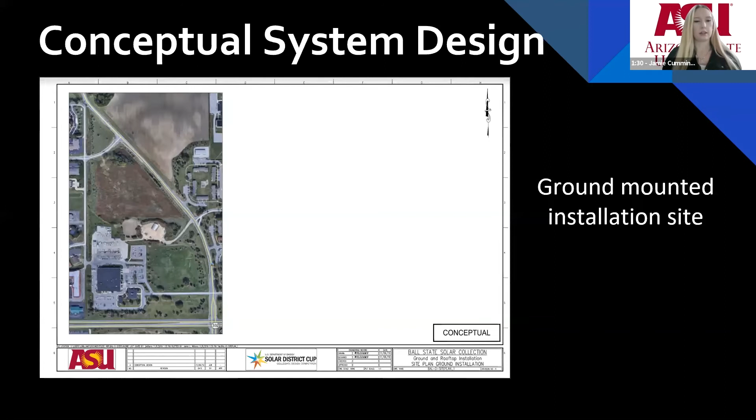Here's the deliverable package. You'll see this is the site for the ground-mounted installation. This is actually not the updated drawing. In the updated drawing, you'd be able to see exactly where everything is placed. And that will be the same case for the building mounts. But here we have a screenshot from Aurora. What we did to simulate the usage was take every use case that we had for Ball State, combine them, and use that as our usage for this particular area. And we arrived at about 5 gigawatt hours for the ground mount.

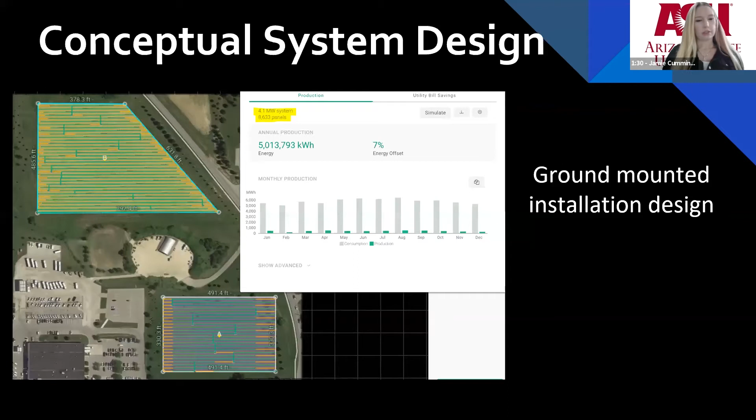Again, like I said, this is the building site. And this particular one is Robert Bell building. And you can see here all of the arrays. Now generally the spacing between them is about, let me double check. I believe we kept about 72 inches between the rows to prevent any shading, but minimal spacing in between, about 12 to 24 inches. And the panels are tilted at 55 degrees almost everywhere, facing due south.

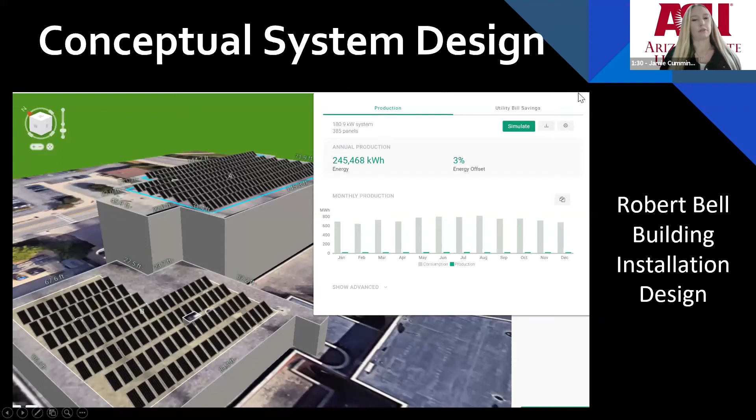So when it came to using OpenDSS, we relied heavily on Trent and his earned expertise through this competition. This here is the initial model. It shows the Ball State University's system without the addition of any solar PV. And then once we were able to get our solar PV, we were able to model it and show that we weren't reaching any peaks.

I think we're fighting over control of the slides. So we were able to, oh no, my slides are running away with me. Sorry, Anastasia, please reset and I'll leave the clicker alone on my side. Okay.

Okay, there we are. So we were able to show that we were not exceeding any max or min settings with the distribution system.

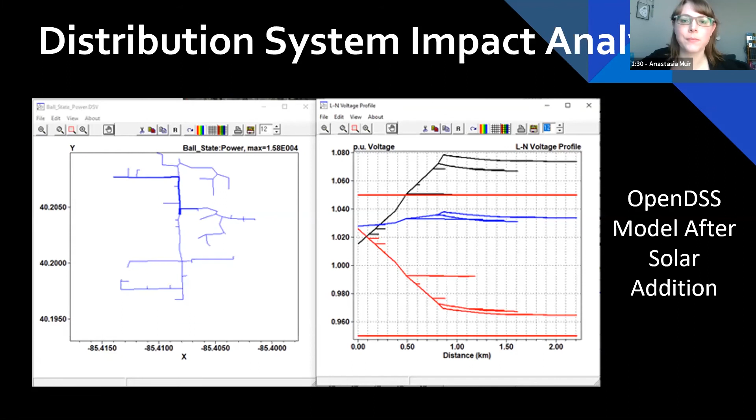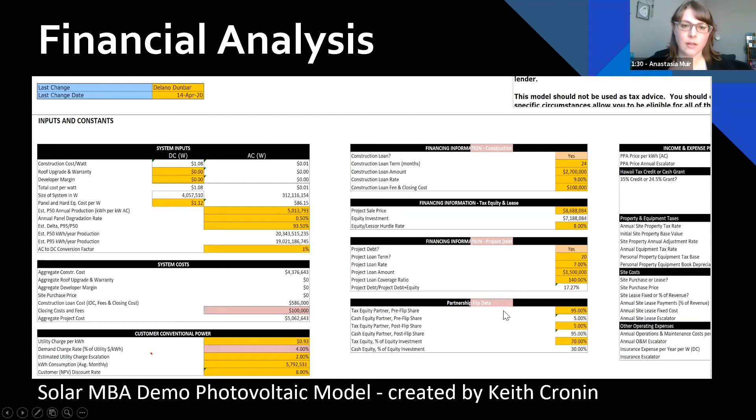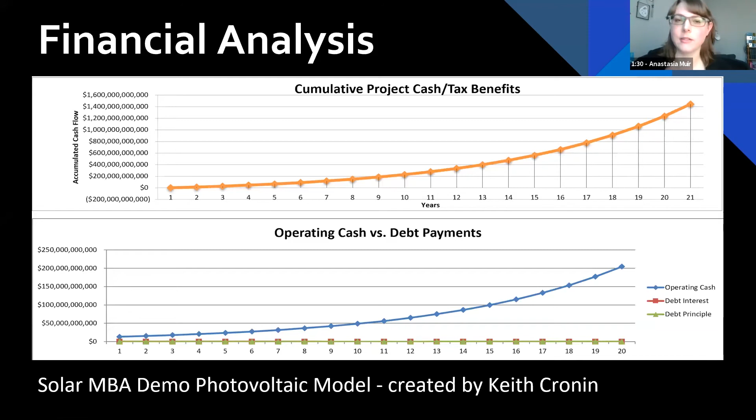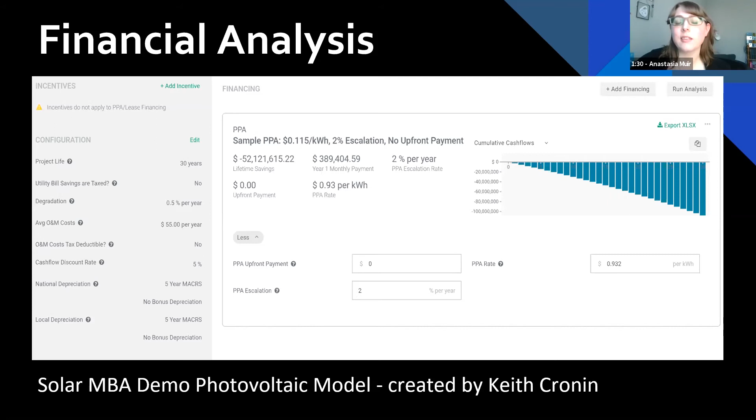When it came down to the financial, using the Solar MBA demo that was provided by the HeatSpring training was absolutely phenomenal for coming up with a financial model. Using the model, we were able to come up with these tax benefits and the debt versus the operating cash and show that we weren't getting quite the benefit that we were hoping for from the solar panels. It was going to slowly grow, but we were only getting about a 2% efficiency from the panels. So we only had a 2% per year growth on the PPA, which over 20 years is still significant, but we were hoping for a bit more.

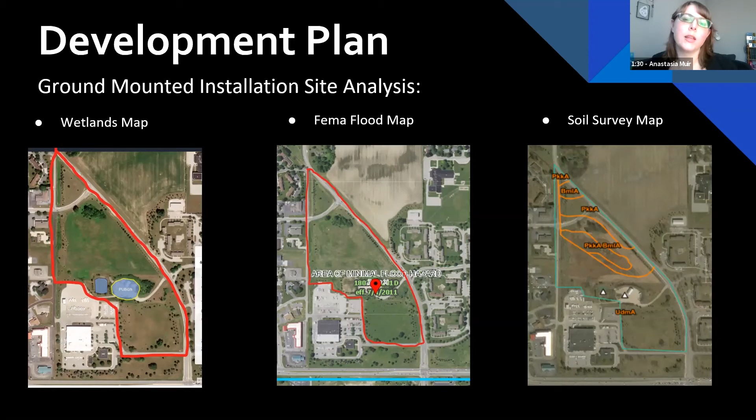A big part of my contribution to the overall project was the development plan and searching through all of the different maps to make sure that where we were planning to build the ground-mounted arrays would be ideal and that we wouldn't have too many financial problems having to grade or having to shore up if there was sandy soil. And we wanted to make sure that we weren't going to have any problems with tree shading. So we came up with an initiative to plant a tree for every tree that was cut down.

And we also found that across from the Ball State University buildings on campus, there is a Westwood Historic District, and we wanted to ensure that the buildings we were placing these solar panels on were not going to affect the aesthetic of that historic district, because then we would upset the residents, and we didn't want to have any sort of pushback or negative influence, because then we wouldn't have the support of the community that we were hoping for that would help us to build these panels on time.

And our construction schedule, with building the panels and installing everything at the ground mount and the buildings, we were looking at 32 weeks to complete construction, which is a bit of a stretch, but we didn't want to build everything at the exact same time, so we sort of staggered it so that we would impact campus life less.

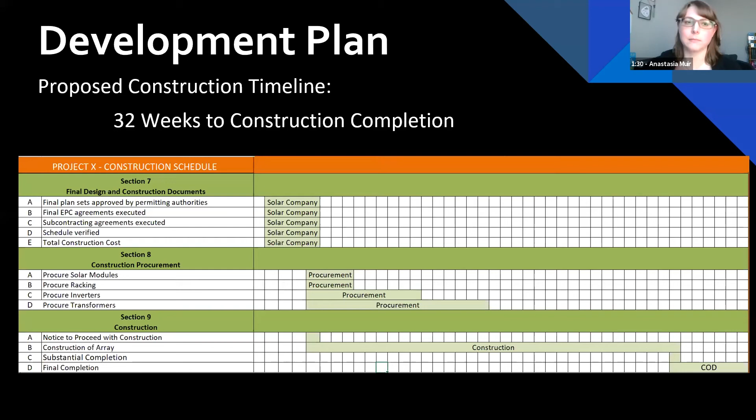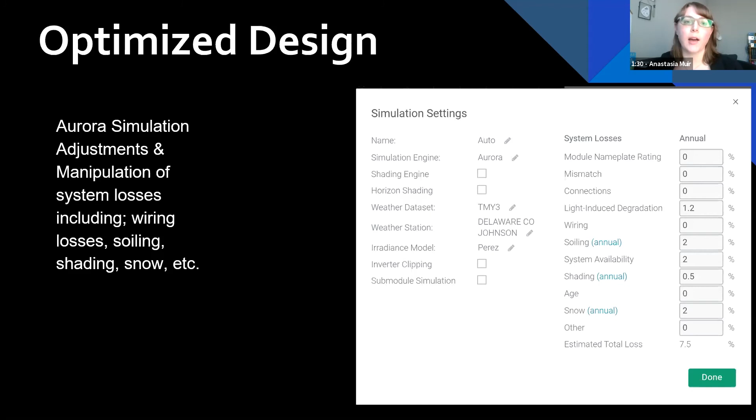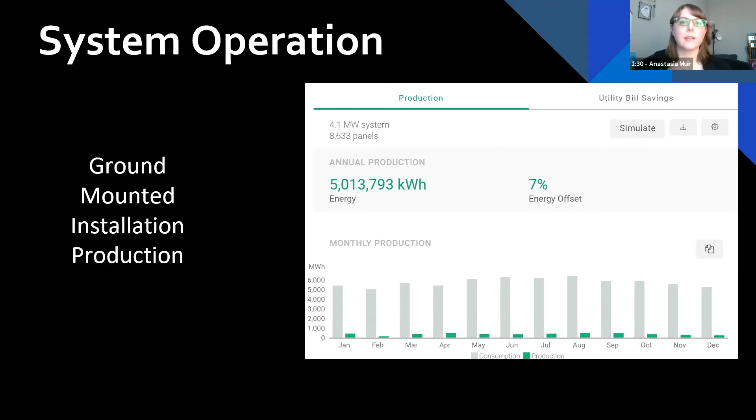Now, using the Aurora simulation, we were able to adjust the system losses and wiring so that we could optimize our design and get the most out of it. And even with that, we wanted to maintain realistic values. We didn't want to be living in some beautiful ideal wonderland. We wanted these numbers to be real. And when we came out, the overall system operation for the ground mounted, we were able to get a 7% energy offset from our 4.1 megawatt system. We were able to do this with our almost 9,000 panels that are spaced 120 inches, so 10 feet between each row to avoid shading.

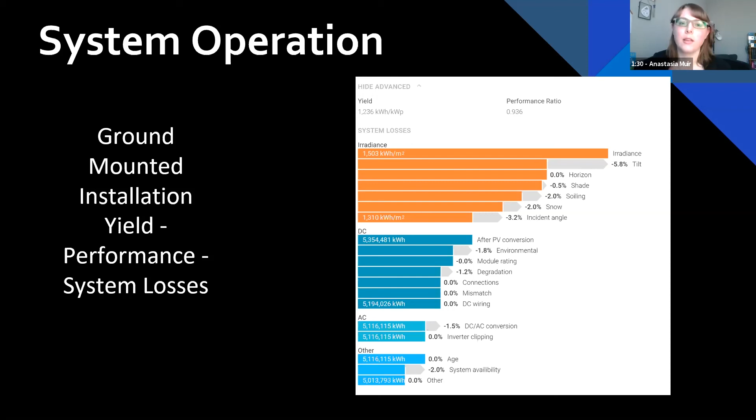Our losses, however, always seemed a little higher than I think we wanted. So our yield wasn't as high as we had really hoped. We were looking for at least 100 megawatts, and we never got anywhere close to that with our system design. But we were able to maximize the usage of the 13-acre ground mount installation site and produce 4.1 megawatts.

Using 7 of the rooftops on the campus instead of the 29, I believe it was, that were available, the cost was too high to make up for the benefit of using the rooftops. So we only utilized 7, and on each building we averaged about 3% annual savings. So we weren't able to get the total production that we had hoped for. And that is the end of our summary.